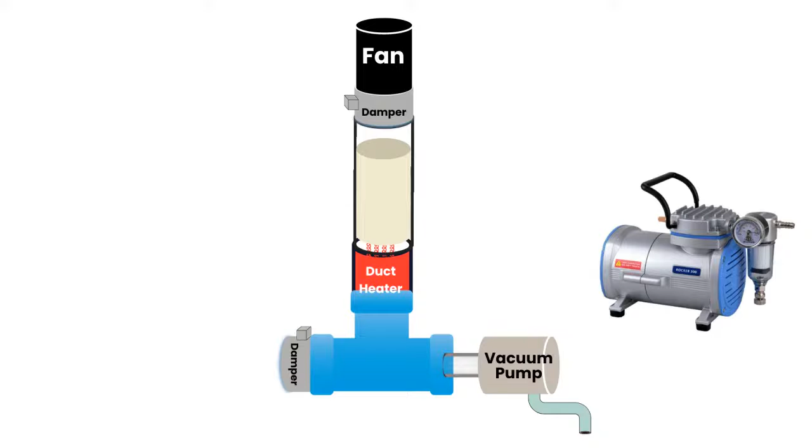It looks like I lost the picture from last week. Sorry guys, I'll find it in a second. But there's basically several parts from a chimney, and there's even dampers that are high heat. There's these other slip materials that this one kind of shows, that can be used, and they're all for airflow and high heat, and they're relatively cheap.

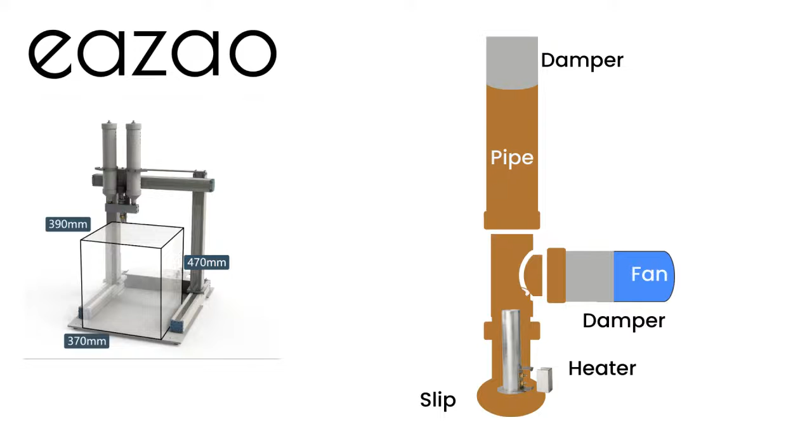Can I go ahead and ask the first question? Yeah, go for it, because I don't think I've seen the chimney design. I like it. I just wanted to ask, when it heats, will it be from the bottom? So it's at the bottom where it heats, and then it builds up, so the airflow goes upwards.

Right, that was the idea. Do you think it makes sense to put the vacuum pump at the top as well, to help facilitate that purge of hot air coming out of the system? I don't know, just kind of a little brainstorm. What do you guys think?

Unsure what you mean by this question - the vacuum pump is on when? During the heating, right? It would be on, and yeah, you have a good point. Yeah, makes sense, I'm open to that. We'll have to find a way to hook it up properly and jig things so it's stable.

But yeah, okay David, what's the sequence of events here? Are we heating it up first, and then we stop the heating and start pumping the released CO2 out, like in 2 steps? Or does it all happen together?

Will, on that part we had talked a bit about how you can combine it to a pressure thermal swing, where you could do that. But I think there's some concerns about a really high vacuum, so the vacuum would probably be used more just to evacuate the tube rather than actually pulling the CO2 off of the monolith. So if it's that, then we could probably do heating, and once heating stops, go ahead and do the vacuum just to purge the chamber. But I don't know, you explain what your thinking is on that.

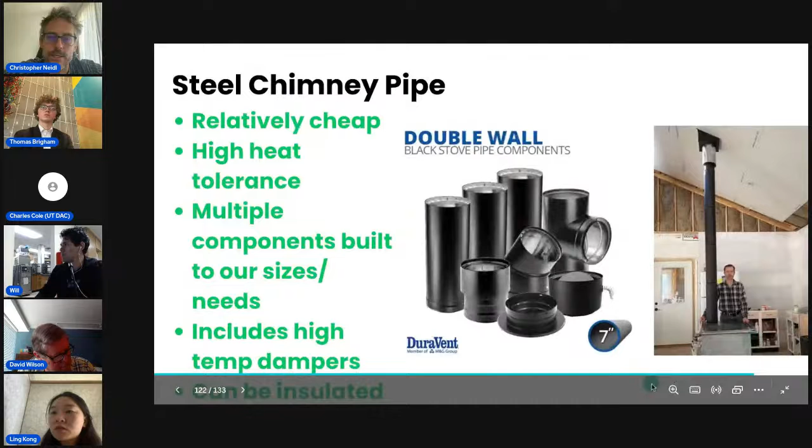If you can see that, in the next slide - it's got these 24, 36 pipes that are 7-inch, 8-inch, 10-inch, 6-inch interior diameter.

They also have these double wall chimney pipes, so it makes it less hot to the touch on the outside, but we could also insert some form of ceramic tape or something that might be a good insulator. It's got this kind of T-pipe, a great little piece, and dampers, which you can add an actuator to.

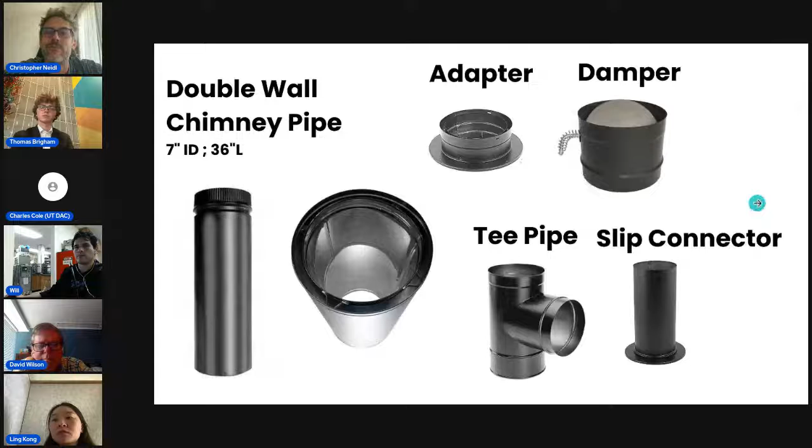I called up the company, they said that wouldn't be a problem. So anyway, it just looks like we can kind of, from parts there, probably put something like this together in the ways that we thought.

And again, a lot of that is because the plastic that we had thought about is extremely expensive, as well as ceramic. At least the stuff that I found, it's like $1,000 for a piece of that dimension just for the pipe. So anyway, that is an issue, but I think this looks good. We're leaning towards that.

All right, cool. Ling, did you want to talk a little bit about some of the math and exploration you did around the monoliths and what we were concerned about or what we were trying to figure out?

Yeah, sure, let me see if I can find my article. So I am pretty unopinionated on the heating and the vacuum. I think I'm familiar with the process, but I've never run through it myself, so I'm open to testing it. If I were to do it myself, I would have to test it and see how it works. But if someone else has a better idea on how to do this, we could just go with that.

Okay, give me a minute. Sure. In the meantime, guys, there's a little bill of materials spreadsheet that we created to put down some of the components that we're considering.

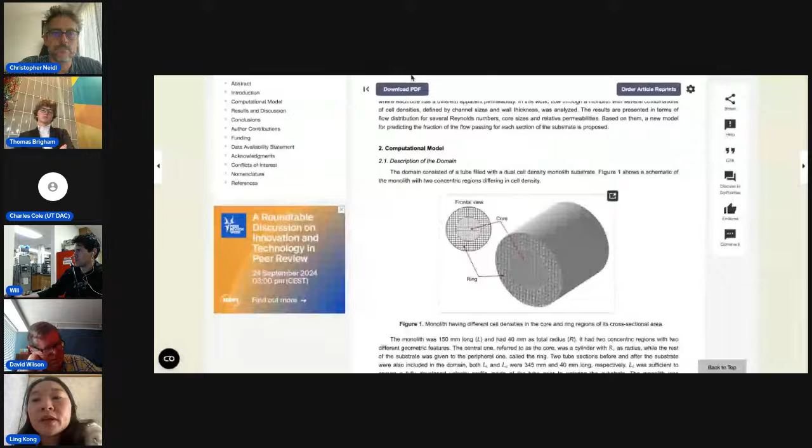I don't think someone who's experienced with these monoliths will really need to read this article, but if you're unfamiliar with the physical feel of these monoliths, the article is really helpful for me, and it's a little complicated, but overall what it is, that picture is really good.

It's a two-part monolith, so to speak. The inner part, the inside of the annulus, has a different CPSI density than the outside. Some of the later plots will show that if you adjust the density of the outside or the inside, what will happen to the velocity of airflow. That was really helpful for me - I have no idea what a certain number of airflow velocity feels like, but it gives me an idea of it increasing by like 2x or 3x or something.

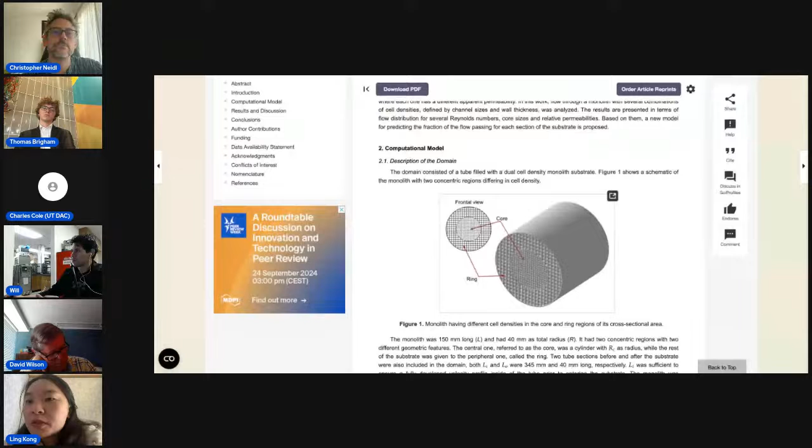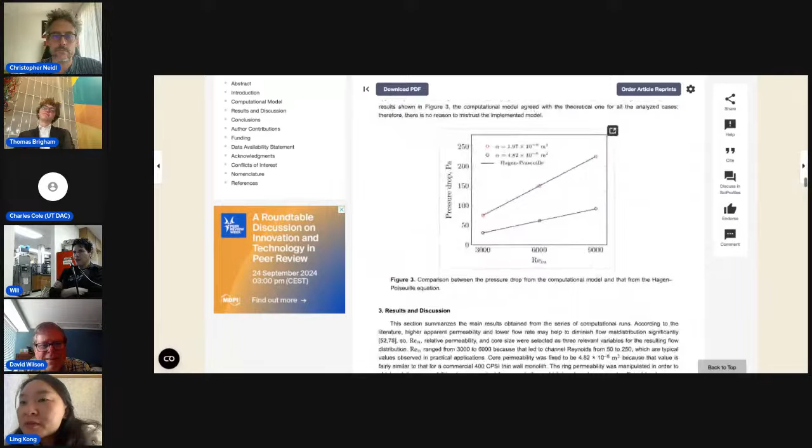Can you scroll down maybe until we get to one of the plots? Yeah, so there's math - my math is quite bad for an engineer. Let's see, pressure drop, let's keep going. Yeah, like one of these.

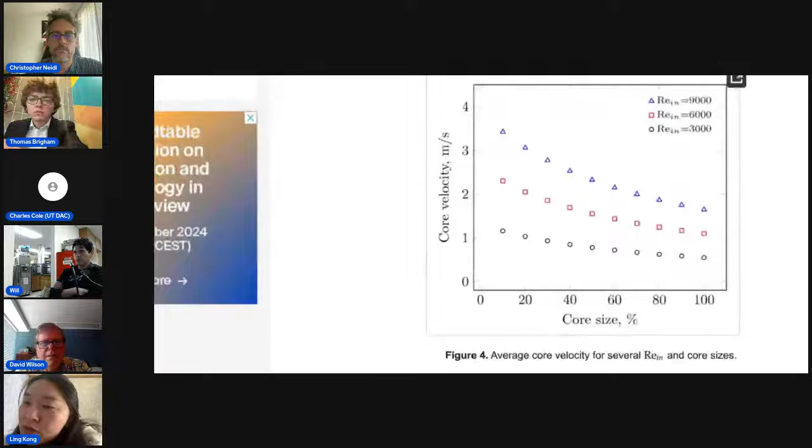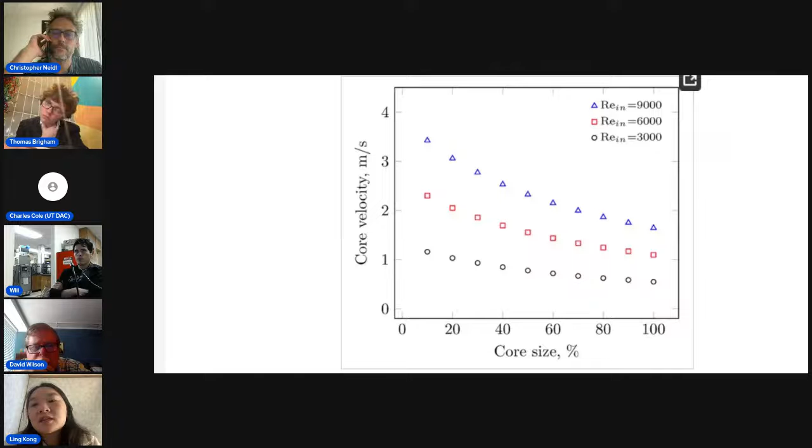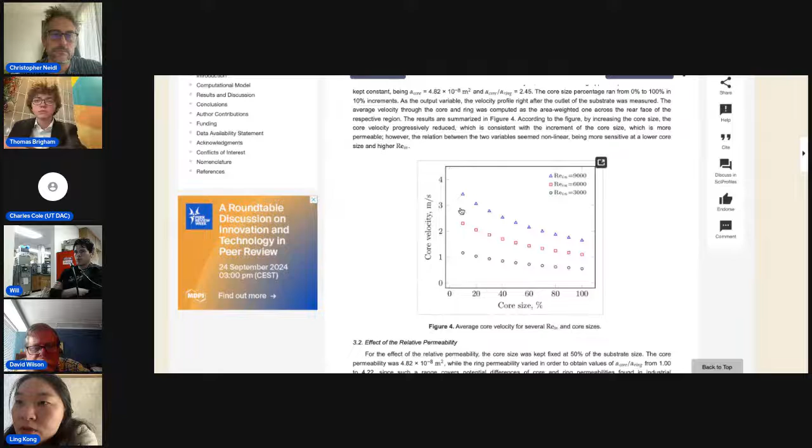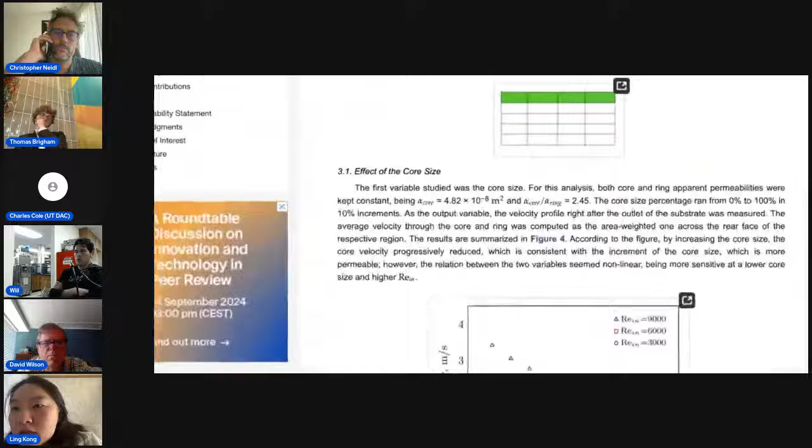Okay, so when you change the core size, you'll have to read the text surrounding this, because core size can refer to the diameter of the inside round area, or it could be the CPSI on the inside. Actually, can you zoom out, Chris? Let's see if we can see some text around it - core size percentage versus... yeah, it's above. So above it explains, and if you hold the core size the same, permeabilities are being kept constant. So I'm thinking that permeability is referring to the CPSI, and then they just vary the size of the diameter, and as the core size... okay, let's go to the graph.

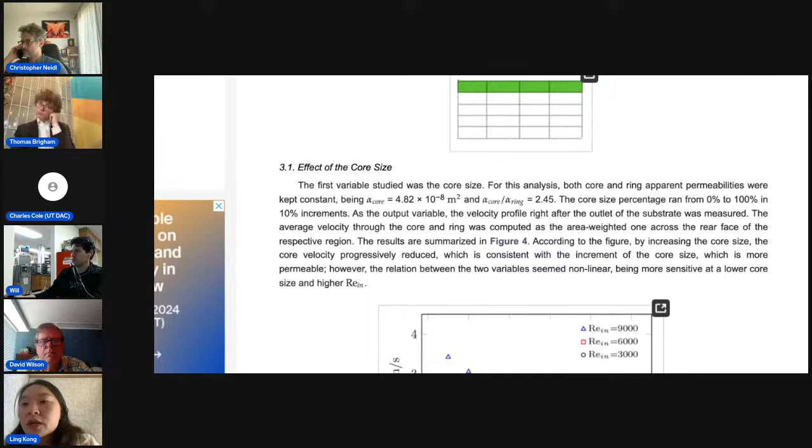Go down a little bit.

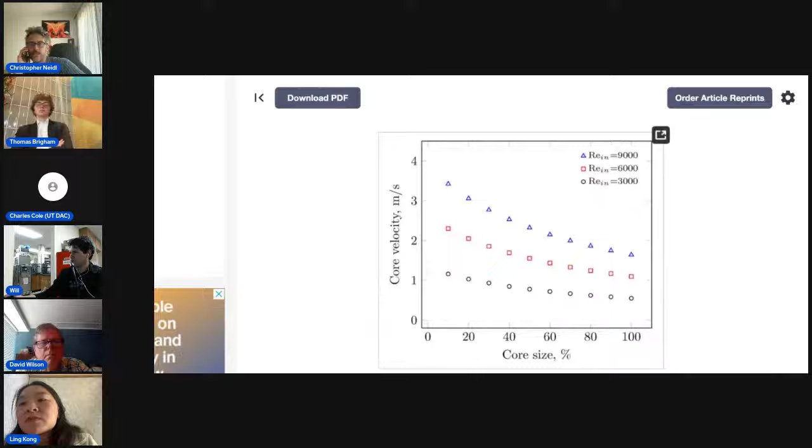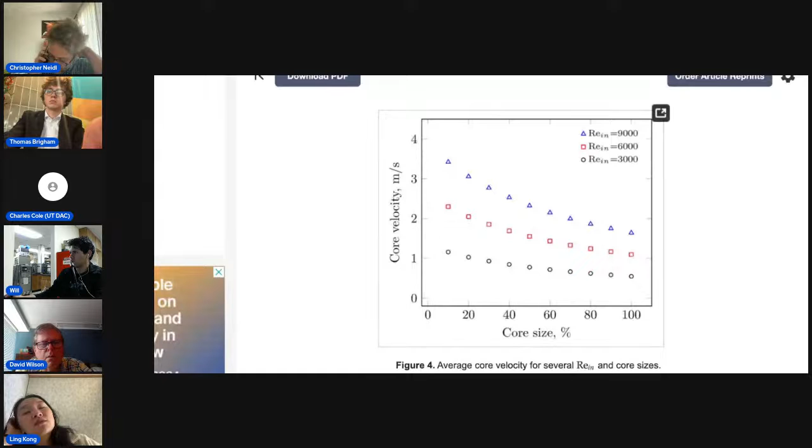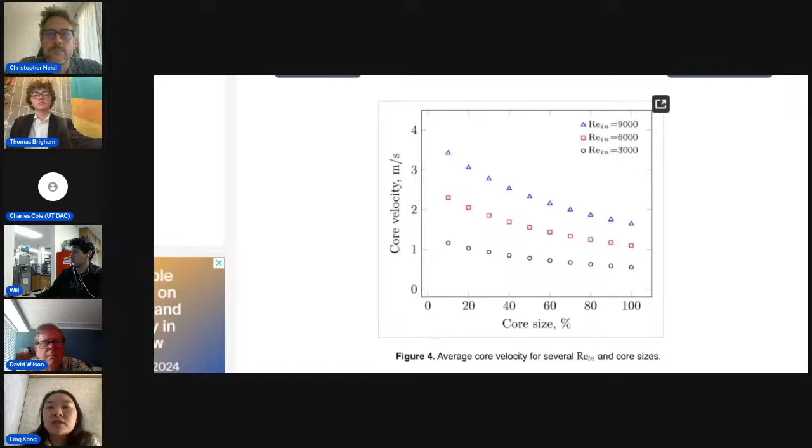As the core size increases, the core velocity is decreasing. Maybe this has to do with the cell size for each of the areas. Anyway, if you go through this and think about it, for the audience—probably the engineers don't need me to explain this—you can think about the proportions of increase or decrease as certain parameters of this structure are adjusted.

I don't really have a lot of direct takeaways from this article, but what I said on the Discord was that we should just aim for a lower CPSI so we can get low back pressure. This article is very proud of the fact that these ceramic monoliths, used in catalytic converters, have low back pressure, and I like that it's giving that support—it gives me more confidence.

Likely, no matter what CPSI we eventually pick, we can make it work. But we want to avoid risk, and if we see that something like 100 CPSI can work really well, we can go for something denser later on. And they seem cheap enough, like you mentioned, Ling—we can get more than one. I'll get a few of them and we'll see.

But Will, this is your territory—I know you work on the monoliths and stuff. And Kirsch, I did post a little message he sent where he didn't think 100 CPSI would be an issue for this application based on his experience. But Will, I'm curious to get your thoughts since you play around with monoliths.

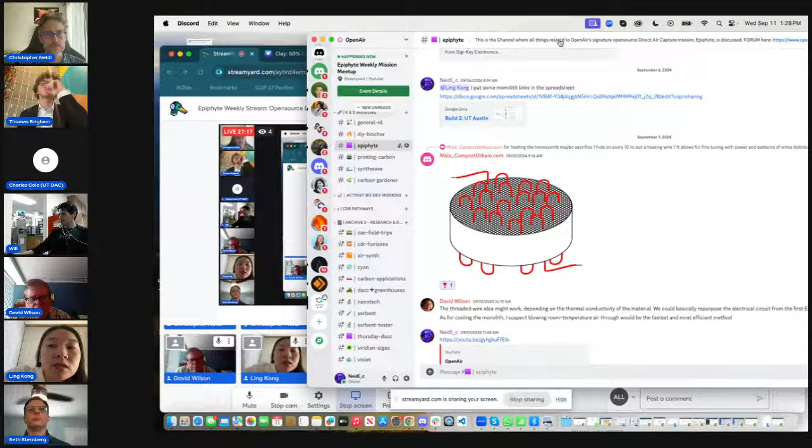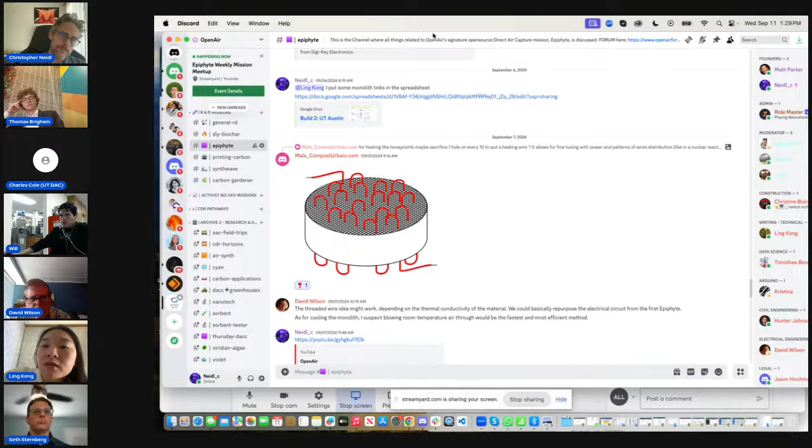Would that damage the monolith itself, that heating being that close to it? I don't know if that's super high heat for that material, its tolerance seems to be well above our threshold here, but I don't know. I don't think the monoliths will get damaged, but keep in mind it is ceramic, and ceramic is pretty low heat conductive. Additionally, in the cells where you're doing this heating, you're likely not going to get that much airflow. Well, actually maybe you will, depending on how thick the wires are, because sometimes they're super thin. I'm not sure what the effect is if you heat the nichrome wires up to a few hundred degrees. I don't think the sorbents will get damaged, but they may not capture it as effectively. I have no idea, it's probably worth being patient and heating it up slowly.

So my response to this was that I don't want to rule it out if anyone is curious, because I've never done this, so I don't know that it wouldn't work, but I would unit test this with 1 or 2 threadings. And if you find it really laborious to set up, it may not be worth it. You should take manufacturability into account when setting up something like this. So if you find that threading through is not a big deal, go ahead and test a few threadings and see how the nearby cells would heat up.

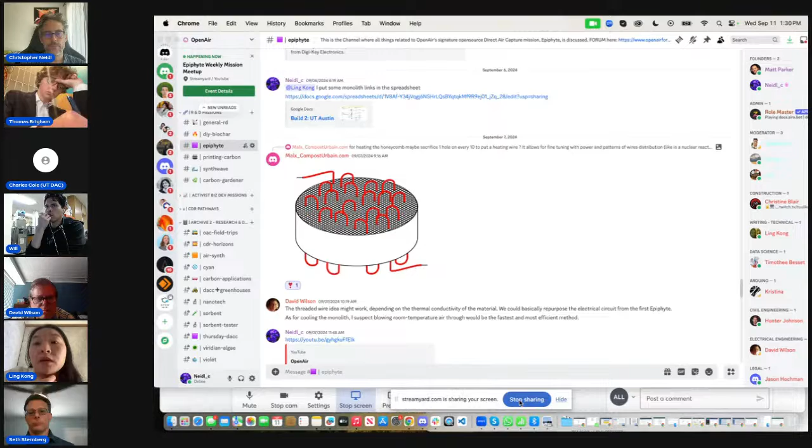So worth considering. I guess we can see how effective we are with our option we have now, but even if it's like auxiliary heat or whatever, just wanted to get people's thoughts on that.

I think that's something we could reasonably test here at the UT DAC at some point. Maybe not immediately, but once we get that going, making an extra one of that. Do you think that's possible, Will? Think it's possible? Cool, awesome. I'll write that down, put a pin in that.

I think we could talk about this a bit tomorrow, but since these things are relatively cheap, I have your monoliths to do the PI testing, but it would be cool to just go buy a couple of these, either order them from Alibaba or go to an automotive shop, there might be somewhere you could actually buy at retail here. Just have a few of these different monoliths on hand that are the size we're thinking about, to kind of play around with. We could run some wires through it, heat it up, whatever.

I think it would just be good to have it in your guys' hands relatively soon. So if we find the one that we want, there was a bunch of options I put there. They're all kind of similar. There's like a zillion options to buy.

So yeah, I've been thinking we may want to figure out the housing, but maybe we don't have to figure out the housing first. Maybe we should just get you guys to unit test the monoliths separately, because it's not a big deal, and then you can learn a lot from the heat transfer properties, which will be helpful to us deciding stuff later down the line. We can just buy more if it's not the right size or shape.

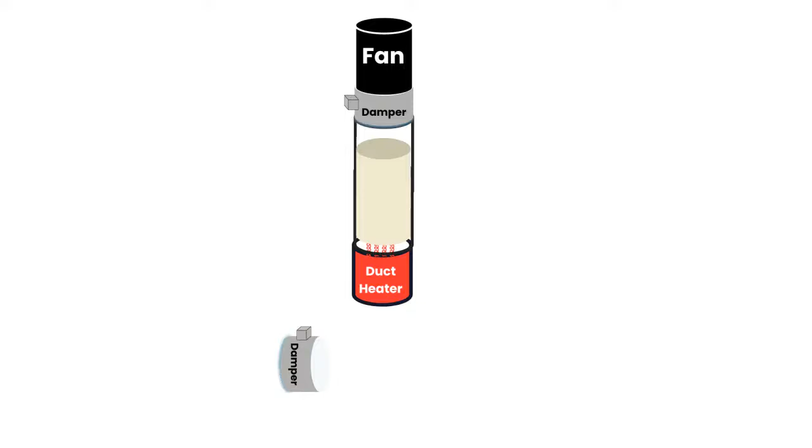Could you just have a big tube next to it? Like basically just a tube right directly next to the monolith, on the outside of the pipe? Oh, on the outside of the tube. Yeah, outside of the pipe. And the thing is, you'll need a small fan someplace. I don't think that just the passive convection would cause it to come back around through the tube.

Okay, maybe we just put the fan on the other side together with the heater, and then we put the bypass below the fan. Make sure the damper is on the outside of the fan. Yeah, that would work too, unless the little fan gets in the way of the big fan when we're doing the capture phase.

I was just thinking the big fan doubles, we don't need the little fan anymore. You could do that too. But then the damper, you'd have to put it on the other side of the fan, right? Because you wouldn't want to open that up. Oh yeah, correct. The big fan could do double duty as long as you can adjust the speed, because for the heating part, you probably want it to be low speed.

Okay, so our buddy J3NX is endorsing your idea, David. Just letting you know in the comments. Thanks, thank you J3NX.

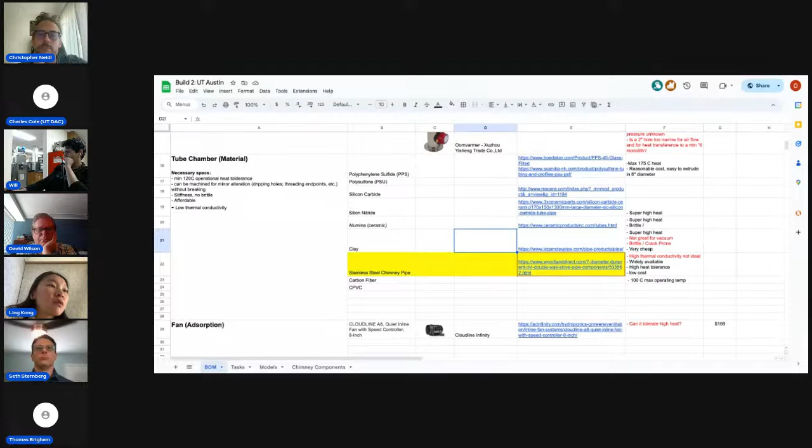It's basically like tubing, if you're familiar with air or water tubing, it's pretty standard it seems. So I'll think about how to get us a set of these parts to hook it up, so that it would do maybe what David said, or I'll look at it to see if it's possible to do what we need any way. And I'll make that my to-do item, but anyone else can feel free to also do it.

You'll learn a lot for sure. Yeah, I didn't think I would learn so much about chimney parts in the last week, but that's part of the fun of it. I like the idea of the double wall.

So should we focus on the double wall? Yeah, I think we do need the air as insulation. Could you use the double wall part, that outer layer, you were talking about a pipe, but with that extra space, could that have any benefit in air recirculation? I wouldn't do that.

You'll get a lot of heat loss. I was thinking we need the double wall because air is an insulator. Yeah, okay, and we need all the heat insulation that we can get. Okay, sounds good, all right.

Well, one other thing I wanted to get into, if you guys will indulge me a bit, we talked about the clay idea. I think we should just go with the chimney part, build that, get a working unit, and obviously keep an open mind to other ways we can make similar parts.

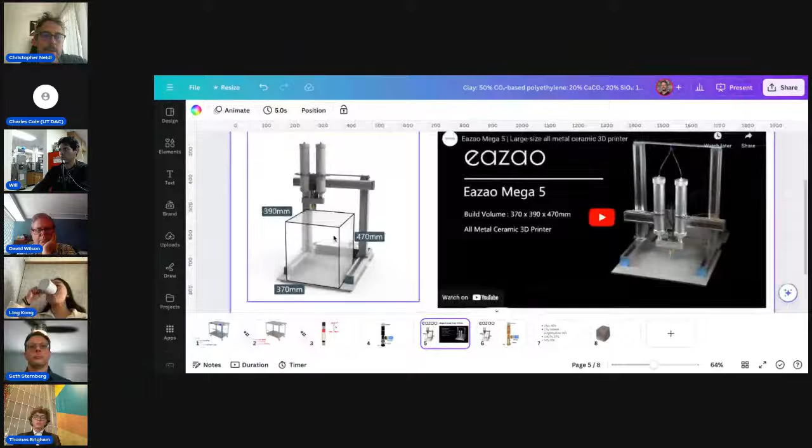But yeah, let me show you this thing here. I think it's pretty cool for a couple of reasons when we think big picture. This here, if you guys can see that, it's the company called Eazao. They're based in China. They were produced through, I guess, one of the largest crowdfund efforts ever. That's how they started. But they have a variety of different clay and ceramic printers. This is the biggest one. But the parts it can make, you can kind of see the dimensions of the work area here.

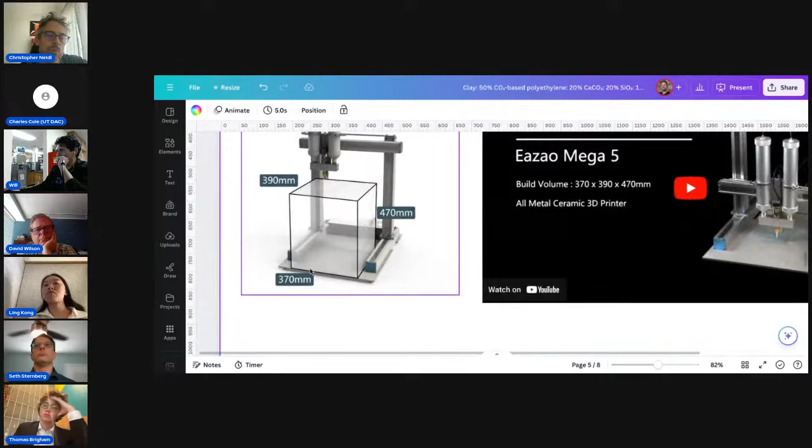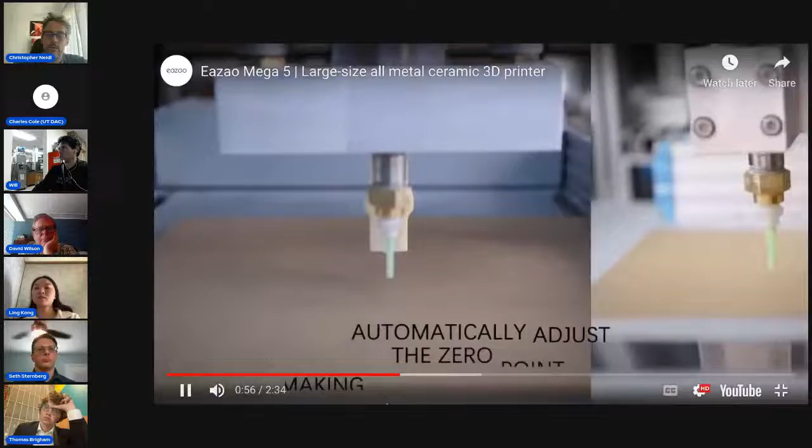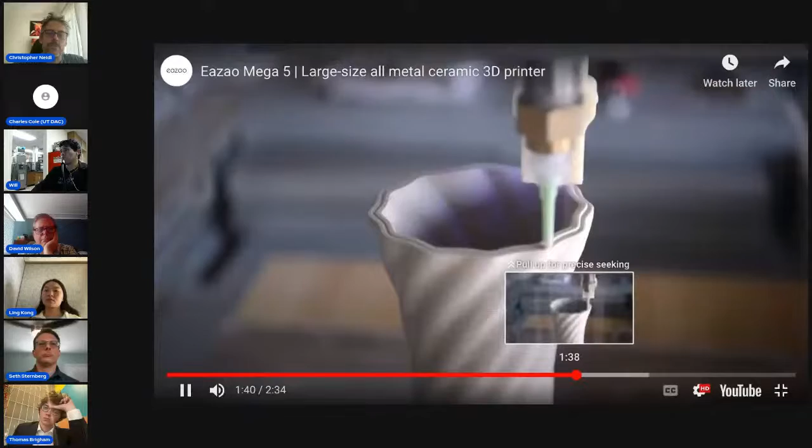And this little video, which might actually play. Oops, I don't know if you guys can see that. Can you guys see that? Is there a YouTube? So it's pretty cool.

When I talk to the manufacturers of it, there's a lot of flexibility on what you can put into it in terms of clay mixes. One of the things I researched on the side is, as a long-term goal, we have this idea of mineralizing CO2 right on the bottom level of the unit, and we talked about that a bit. Kirsch led us onto brucite, and I researched that a bit.

But there are other ways of doing it where you can add polymer beads to the mix, particular kinds that actually reduce the temperature below 825, which is when the decomposition happens, so you don't have to get it that hot for it to heat up enough. I then looked into some of the providers of these polymer beads, and there's a company I know quite well, actually know the guy who founded it, called Lanzatech, which makes those polymers out of CO2 from industrial sources. They capture it and make them into these little beads.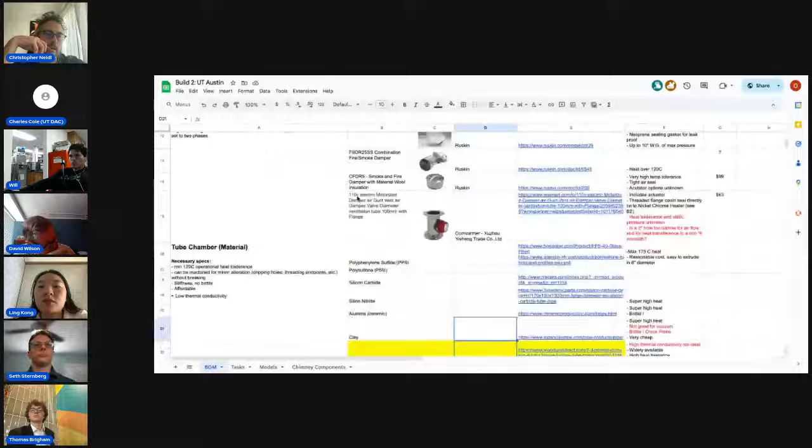Okay, so I will look into the chimney components. And I forgot to mention, I didn't notice this—there's an extra tab called chimney components. I assume it's from when Chris called up these people. So I'll probably add my ideas there on which ones we should buy. I'll probably look at those too. Look at your notes. Yep, that sounds great.

A lot of good videos from that provider. Northline Express is an online retailer of parts made by Dura—something, I forget the exact name. They created a whole bunch of videos on YouTube that show up close how they fit together, and that's one of the things that made me sort of fall for it, being able to see those. So if you look up Northline Express, you can see their YouTube videos and how all the parts fit together. You'll see the total range of any part sizes we'd want, 8 inches or 10 or whatever we want.

I was just gonna say, to your point, I know you were concerned about making sure that the people building the machine are also the ones involved in the design process, and I appreciate that. I remember you expressed that a few meetings ago as well. We'll do that, and we're currently constructing a to-do list and organizing a lot of the thoughts in the Epiphyte chat for the students. But I'm also gonna encourage them to watch these meetings as well. And I know Chris is super good at watching the chat, so they'll be involved that way too.